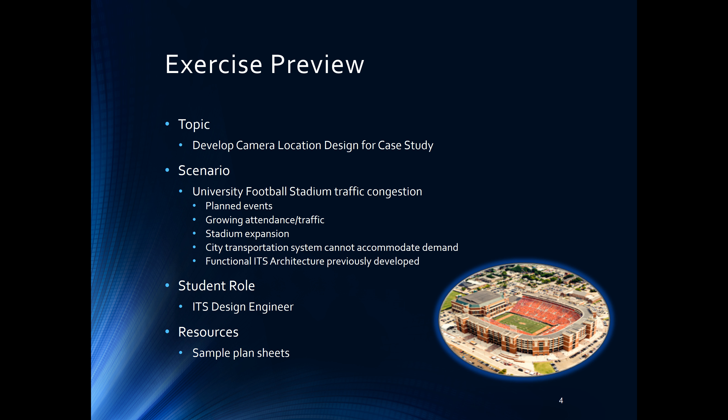So the activities you'll have for this case study, done individually, are: number one, siting - where are you going to put this camera so that it gives you the most advantages? Number two, how do you get power to that camera? Number three, communications - how do you make sure you can communicate with the camera? One of the real challenges for a camera is it requires relatively higher capacity for communications versus low-capacity devices like detectors or message signs.

There's another task on structures. I pulled that one out because it gets a bit into geotech, and I know there are a number of people in the course who don't have a civil background, and I don't think that's really the focus of the course, so I think it's better to take that piece out. And then finally, the last task is on integration and testing, which is an important concept that gets forgotten a lot too - how do you make sure that what you've installed really meets the requirements you defined in your design process?

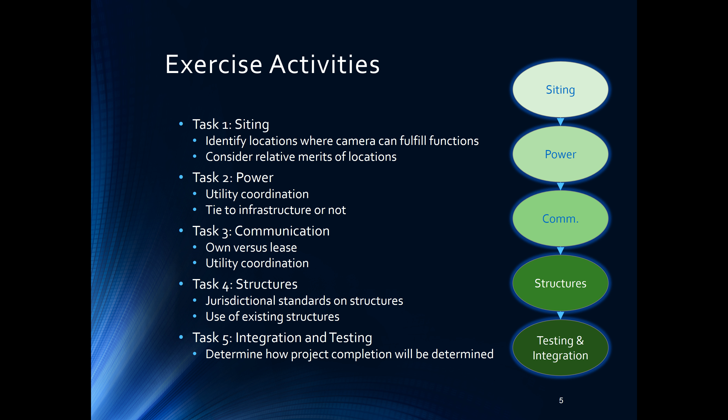Power - getting power to devices is often more of a challenge than you think, because in general you don't have power runs out to these locations on highways. Communications is becoming less of an issue than it used to be, simply because wireless is becoming much more prevalent and higher capacity. But in the older days, getting wireline, whether fiber optics or copper, to a site was a big issue. And finally, hydrology - you have to deal with stormwater, and that can have a huge impact on ITS sometimes.

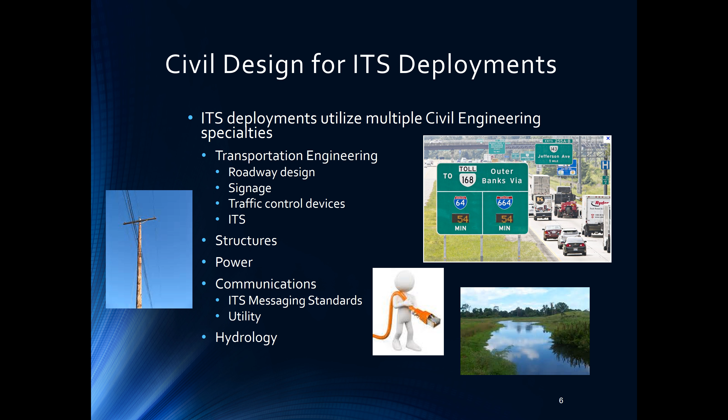So another important thing to consider is that these ITS projects don't occur in vacuums. Typically, you're going into constructed facilities and layering this on top of it. So you've got existing roadways. Ideally, you have some plans to work with. Sometimes you don't have anything more than old scans of older drawings. You've got signs that are out there, control devices that are out there. The issue is how do we reuse what makes sense, create new what makes sense, and make it all fit together.

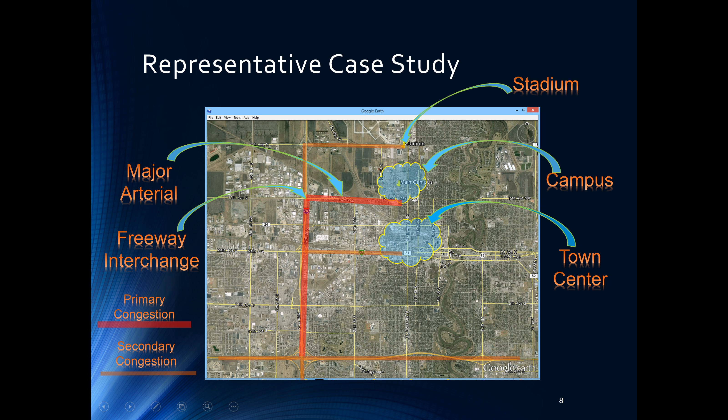So again, in this project, familiar to you, we've got the stadium, the campus, the downtown, and we've got a major arterial freeway interchange, and we're looking at the camera location to try to best monitor the situation.

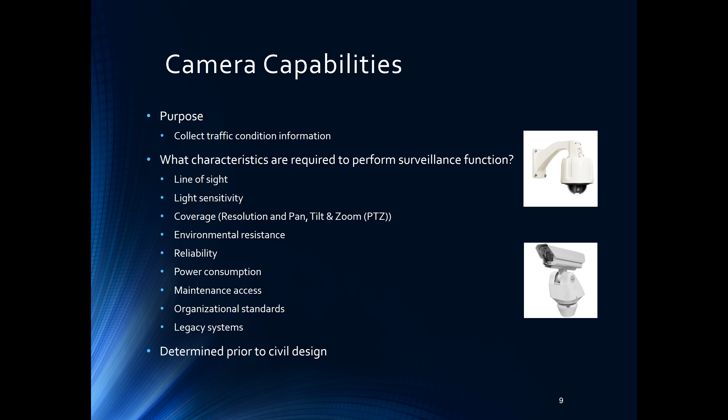So again, you want to be able to figure out what you need for a camera before you figure out where to put it.

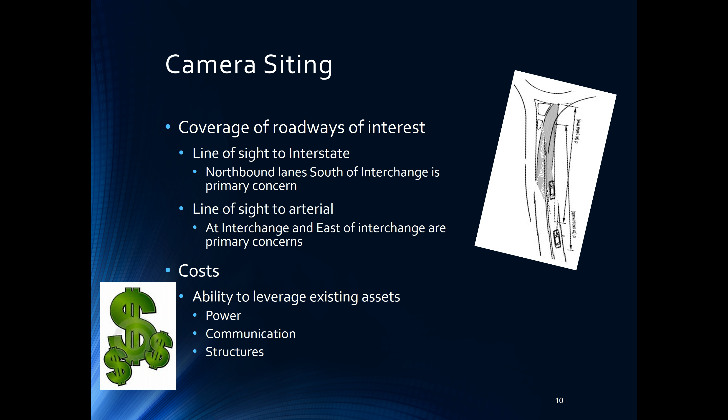So for this project, you're looking at a line of sight for the northbound lane south of the interchange as a primary concern, but you've also got some other locations, and you want to be able to leverage your existing assets. In other words, you might put the camera at a place that's best for the site, yet in that situation you don't have any power or any comm to take advantage of, so the cost goes up. So you have to look at those trade-offs.

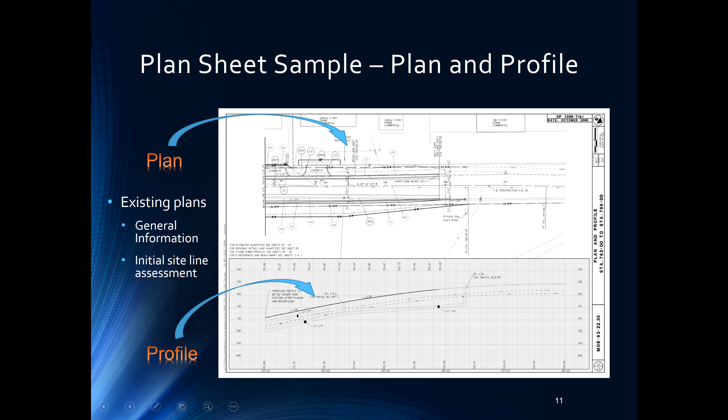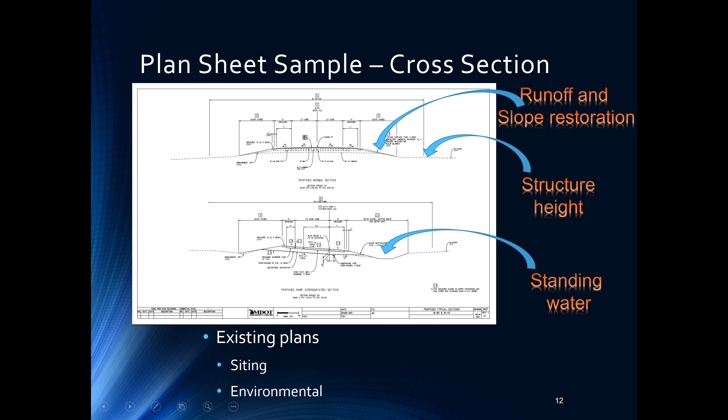These slides talk about, again, in the perfect world, you've got existing plans that you can work from. So in this case, you've got a profile view - I can use that to look at my line of sight, depending on where I put my camera. And then plan view, I can look at how far off the roadway I can be to put my camera. I can also use this, if I have this cross section here, if I have my structure in this location, I've lost so much height already based on the center line elevation. So this gives me environmental considerations. Here's a culvert - I use these to get a better sense of where to put my camera.

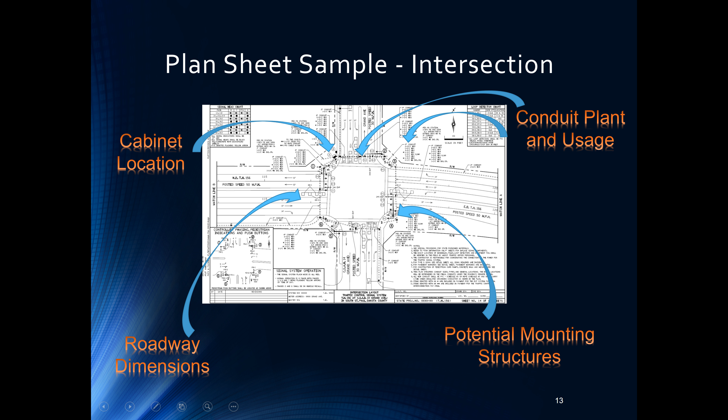And then finally here, an intersection plan view. We've got a pretty complex situation where I have things like, here's my cabinet, I've got certain conduit and plant usage already. I know my dimensions here from my plan view. So you see here I have a pretty tight site, and where to put a camera here is not a trivial matter.

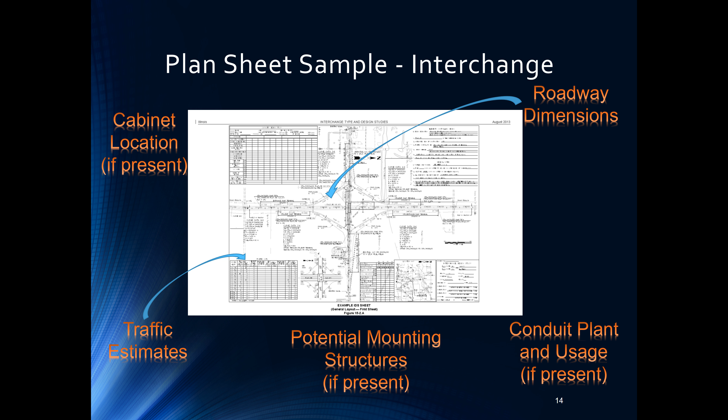And then you go to things like, where's the cabinet? Are there structures there? In many cases, the best structure used for a camera is a structure that already exists, because that saves an enormous amount of money and makes it much easier.

Communications. Again, you have to think about things like bandwidth. Bandwidth is the same thing as capacity, really, from a communications perspective. Reliability.

Security is a bigger and bigger issue. In fact, there's been a lot of interest in what are called IP cameras, cameras that you just put right on the internet to integrate into ITS systems. But that also makes it much more vulnerable to hacking than a camera that's traditionally just connected right to an agency-owned fiber network, for example.

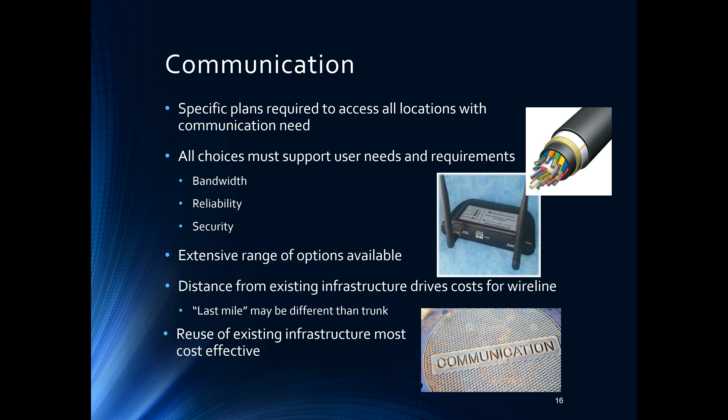So this last mile, so to speak, can be challenging too, pulling off of a main communications line to your more remote site. So again, all issues, there's not a perfect solution. Like I said earlier, though, it is becoming much more manageable given the improvement in wireless technology in recent years.

Okay, a big part of completing an ITS project these days is to really be able to show that these devices work integrated into a system. In other words, yeah, the camera should function fine by itself, but is it tied to your system? Can I control its pan, tilt, and zoom from control software? And how do I go through and test that the system is working right?

This is where good requirements makes a big difference. If I have good requirements and I say a camera must have the capability to pan, tilt, zoom, have this field of view, when you go through the acceptance testing for the system, which is something you do at the end of construction essentially, you basically go through those requirements step by step, and you figure out that all the requirements you defined are met in the actual system.

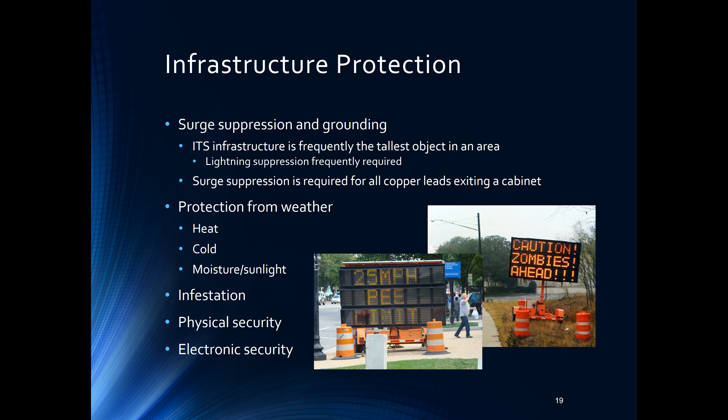And again, I was a bit ahead of myself, but this integration and testing is a big issue. You need to make sure that using the systems engineering V process, it also requires a very systematic, very thorough testing of a system to make sure that each requirement is met properly.

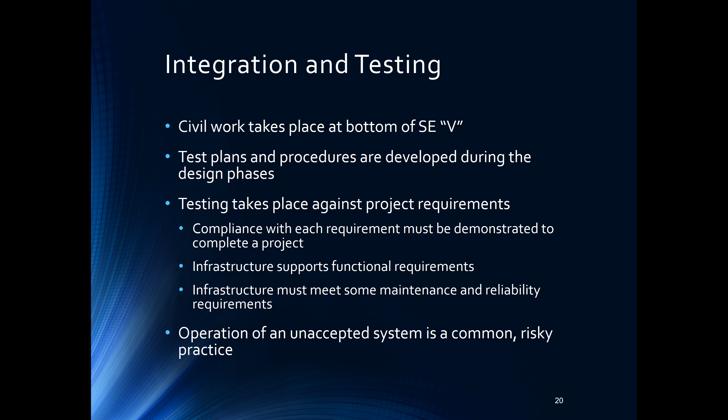Finally, the case study ends with asking you a bit about evaluation. This is something the DOT has pushed a lot. I think it's been done with some level of success, but it still needs more. That is, can you go back to a system and be able to prove, or measure, how effective it is in meeting its goals? A very common approach for people is to say, okay, I got this thing done, now let's move on to the next project, and not follow up and say, well, how well does this work? So the idea of defining goals well up front, good performance measures, and using those performance measures for evaluation is really important.

And that's exactly what I said a moment ago. So that is the end of the intro for this unit.